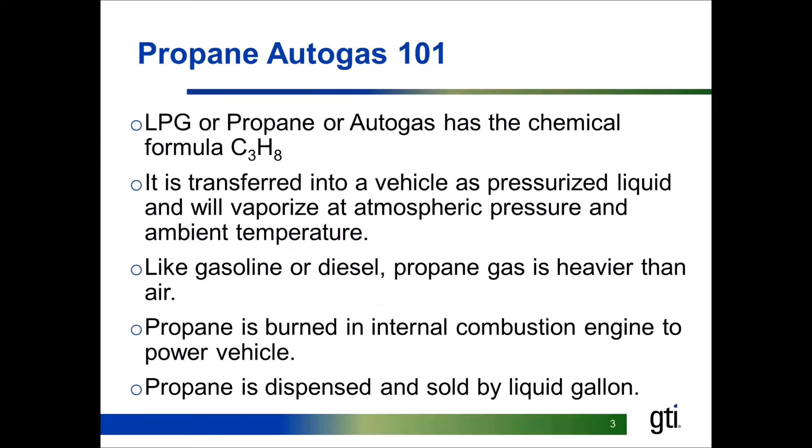Since 1993, the Energy Department's Clean Cities initiative has supported community-led efforts to deploy vehicle and infrastructure technologies across a broad portfolio of alternative fuels, helping to reduce America's reliance on petroleum.

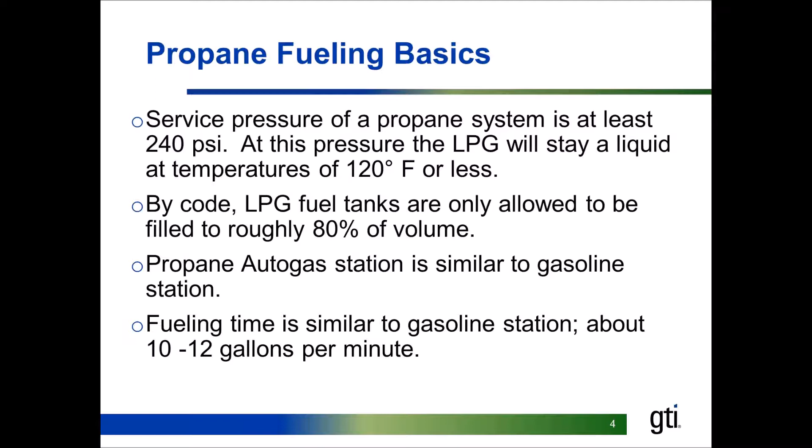A filling station for propane autogas is very similar to a gasoline station. I have a cartoon image of one on the next slide here to go through. The fill rates are similar, which is a nice benefit for many fleets, at 10 to 12 gallons a minute filling times.

So here's an image to give you an idea of a propane station. They can be very involved, with large canopies, very similar to a traditional gasoline station, and they can also be small, like you'll see at a U-Haul or someplace where you can fill up your propane tank for your grill. But the general parts are: there's a storage tank where the propane is stored, a pump that pumps the liquid to the dispenser, and then the dispenser puts the fuel into the vehicle. In general, it's a very similar process to what your traditional fuels do.

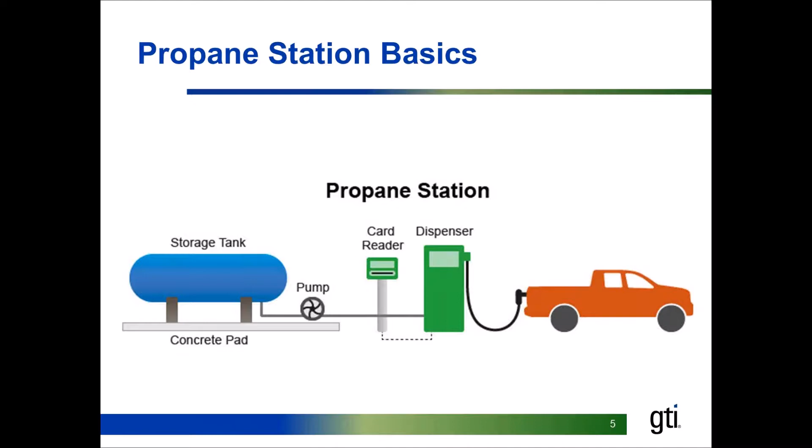We always like to cover safety hazards. It's important to remember that all fuels have situations and hazards you need to be concerned with, and with any new operation, training and education is always key. It's very important when looking at new alt fuels that you educate your employees on each specific fuel. For propane, the hazards are similar to gasoline: propane is a flammable fuel, and ignition sources should not be in the fueling area, like cigarettes.

Propane is stored at pressure, relatively low pressure, 200 to 300 psi, but there are hazards of pressure. There can be freeze burn if you come in contact with liquid propane, and propane is also an asphyxiating gas. All of these hazard situations do not occur under normal operations, but they are things you need to be aware of.

Now moving on to natural gas. CNG is the vehicle fuel. It's the same natural gas that comes to your stove, hot water heater, or furnace if you're on a natural gas pipeline. It's mostly methane. Throughout the process from the meter all the way into your vehicle, it stays as a gas.

We're not going to cover LNG, liquefied natural gas, in this presentation, though there are applications coming up more and more for LNG as well. So unlike gasoline, diesel, and even propane, natural gas is lighter than air and always in a gaseous form. However, it is burned in the same kind of internal combustion engine as a traditional vehicle.

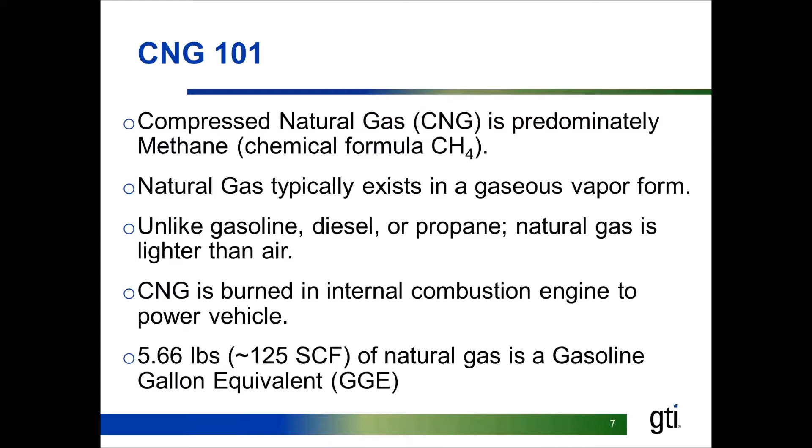When natural gas is sold at a station, it's sold in the gasoline gallon equivalent. It's not sold by a liquid gallon just because it's not a liquid. But what the natural gas industry has done is sell it with the same energy content. So when you buy a gallon of natural gas, you're getting the same fuel economy essentially as you would with traditional gasoline.

Natural gas CNG is stored at high pressures, so 3,600 psi is kind of the nominal pressure. That's at a settled pressure once filling is done. On a 70-degree day, 3,600 is where your tank should be at full. During filling, it heats up. On hotter days, you can fill up to 4,500 psi so that it would settle down to 3,600 at 70 degrees.

Fueling is typically done at a fast fill CNG station. The fill rate's about 5 to 10 gallons a minute. There are higher flow nozzles available. You can also have time fill for fleets that stay parked overnight in the same location. It's a slower process, and can take 4 to 10 hours. It depends on the size of your compressor and the number of vehicles, but it could be a lower cost option for larger fleets.

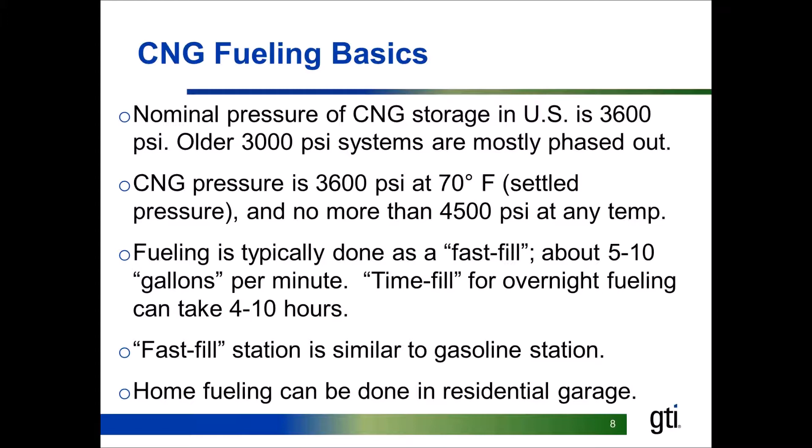Fast fill is similar to a gasoline station with a dispenser filling the vehicle. And home fueling can also be done. There's a residential appliance you can put in your garage, and a very slow fill overnight if you have an individual vehicle.

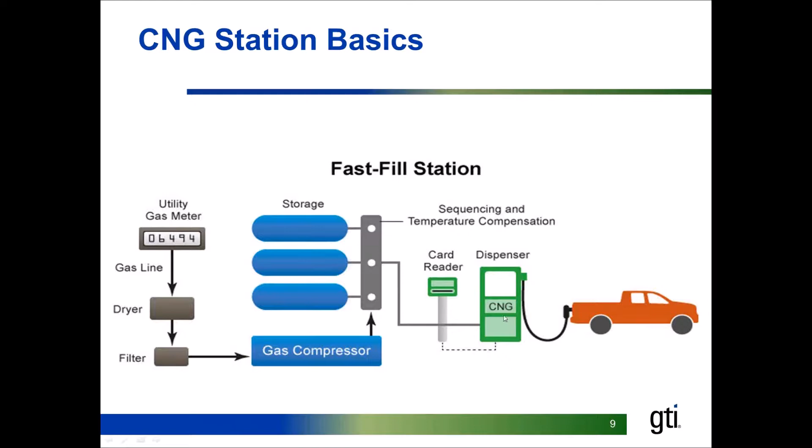CNG Station Basics: you have a gas meter, very similar to what you'll have at your home or commercial buildings. There's a dryer that takes out any moisture in the gas, a compressor that raises the pressure from your line pressure up to approximately 3,600, and then sends the gas to storage. The storage then flows the gas to the dispenser and into the vehicle.

Safety hazards for CNG: similar to all of these fuels, CNG is a flammable gas. Ignition sources are forbidden in fueling areas. CNG is stored at very high pressures, and high pressures can pose risk to operators. Natural gas is also an asphyxiating gas, which can displace oxygen if trapped in an enclosure.

The final fuel I'll give you a general background on here is electricity. Electricity is the same electricity that you have in your house typically. You have AC power delivered to your charging station - the technology term is the electric vehicle supply equipment. The AC power is typically converted to DC power in the vehicle, because it's stored in the battery as DC power, and DC drives the vehicle's electric motor.

So that's another difference - it's a completely different drivetrain. You have an electric motor rather than an internal combustion engine. Electricity is typically sold at kilowatt hour. When charging stations are used commercially, there's a variety of different ways people have used for charging: some have monthly subscriptions, some have a per hour charge, some have a price for hooking up, some charge per kilowatt hour, and there's other models out there as well.

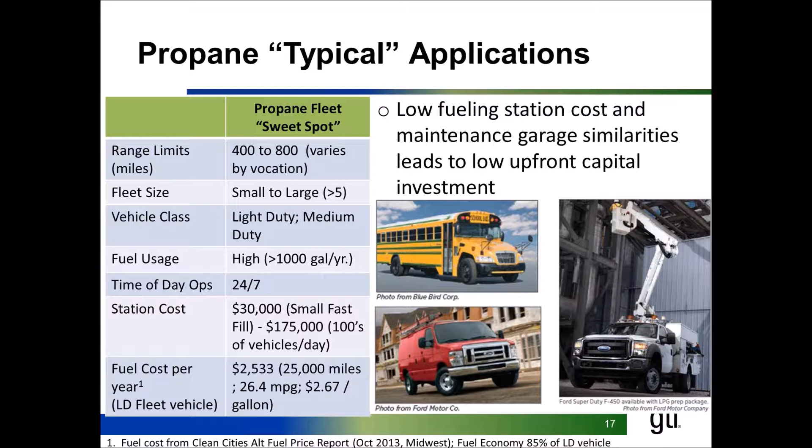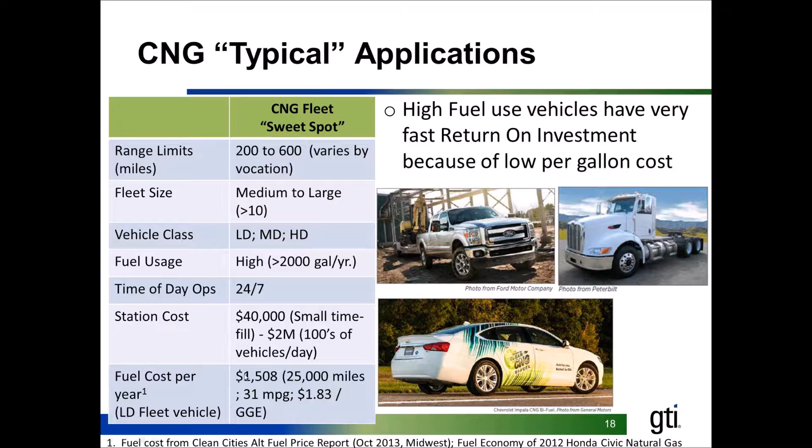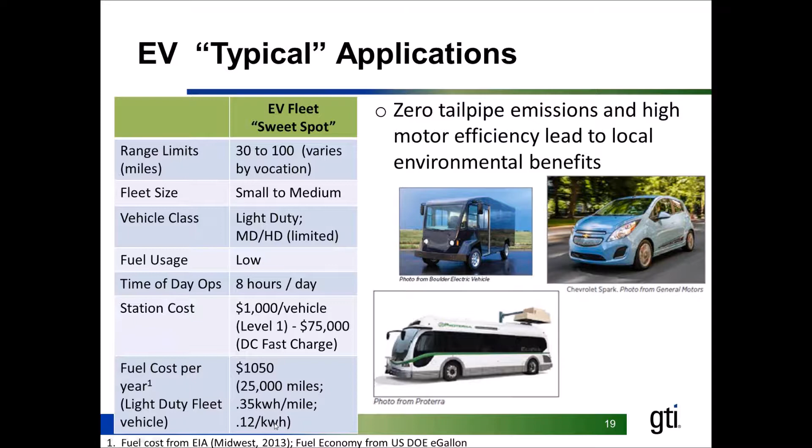Where EVs definitely shine are their station costs can be very low. The fuel costs can be very low as well because you're paying just for the electricity potentially. And then, of course, there's zero tailpipe emissions, and an electric motor has very high efficiency, so it's more efficient than an internal combustion engine, and so it can lead to wonderful, local environmental benefits.

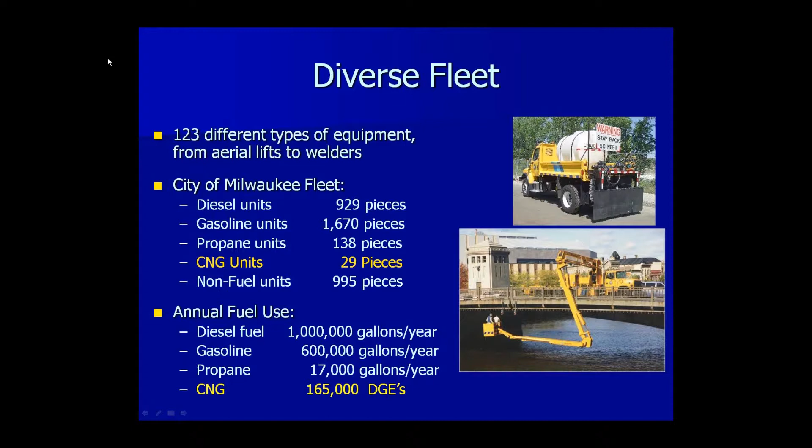First and foremost, I just wanted to say welcome, everybody. We have a very diverse fleet of equipment at the City of Milwaukee, and you just get an idea of some of the different types of vehicles we have and the amount of fuel that we use per year. The CNG right now, we are actually measuring it here in diesel gallon equivalents because most of our CNG vehicles are formerly diesel vehicles. I'll get into that in just a moment here.

The heavy trucks that we have include the 21 refuse packers. We have another 22 on order right now. We also have small, mid-sized cars, and we have 5 cargo vans that are running on CNG.

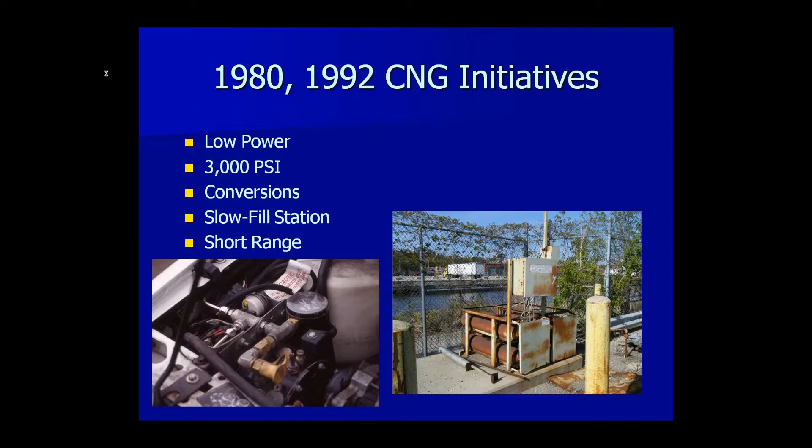Okay, the CNG and in general, the alternative fuels are really nothing new for us. We actually tried back in 1980 and in 1992 with a couple of different CNG initiatives. One of the pictures on the left there is of a Chevy Cavalier, where we converted the engine to run either gasoline or natural gas. And the picture on the right is the remnants of our old CNG station that was able to fill 1 vehicle per day. So back in 1980, that didn't really do us a whole lot of good.

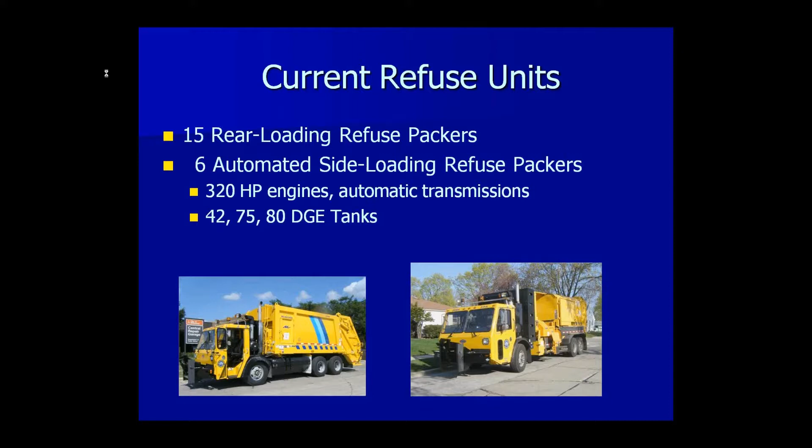Our current units, though, beginning in 2010, we have the 15 rear-loading refuse packers, the 6 automated side-loading. They do have the Cummins ISL-G engine at 320 horse, the largest at the time that we could get. The truck on the left actually has the 42 DGE tanks, and what we found is if you didn't have a good source of fuel, sometimes we had to refuel that truck a couple of times a day. The truck on the right has the 80 DGE tanks built into that black cascade right behind the cab. Unlike what you may have been reading in some of the trade magazines lately, where someone is claiming to have the first CNG snowplow in Wisconsin, we've been doing it with our trucks since 2010. What we've noticed is that the power on these trucks, especially when plowing snow, has not diminished whatsoever.

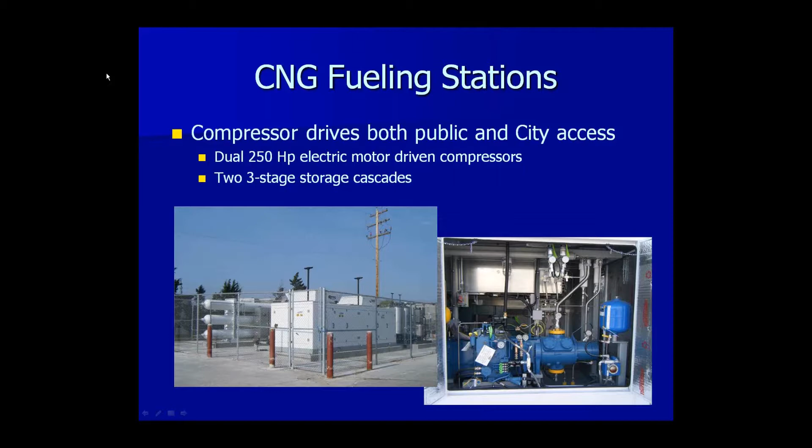Now, we have our own fueling stations that we built, and I'm sure Ted might appreciate this. This is the station over at our Lincoln facility, where we have 2 250-horse electric motor-driven compressors, and then we have the 2 3-stage storage cascades, one in the back here behind the fence. We have another one up front in our building because the stations were grant-funded, and because of that, one of the provisos was that we needed to provide CNG retail for customers outside of the city. Normally, we just would use fuel cards for our own vehicles, and the public didn't have access to those. But we were all too glad to do it, especially because we had this humongous compressing station for our vehicles where we can fill probably, I think, like 11 vehicles within a 1-hour period at 75 DGEs from nothing to fully compressed, which is phenomenal.

This is the fueling station access from outside the street. It's available 24/7. We have both 3,000 and 3,600 PSI available for the older vehicles that still run on 3,000 PSI, and it's credit card access only. The rear access for our other trucks is strictly 3,600 PSI, requiring an employee card or a mag stripe identification card.

But we also wanted to get into hopefully saving a little bit of electricity with regards to the slow fill portion of our system. Now, unlike some of the other people that we know have a slow fill where they just hook 20, 40 vehicles up at the end of the day, and the system comes on maybe at 8 at night or so and saves a little bit of electricity, we actually want to know exactly how much fuel went into each vehicle.

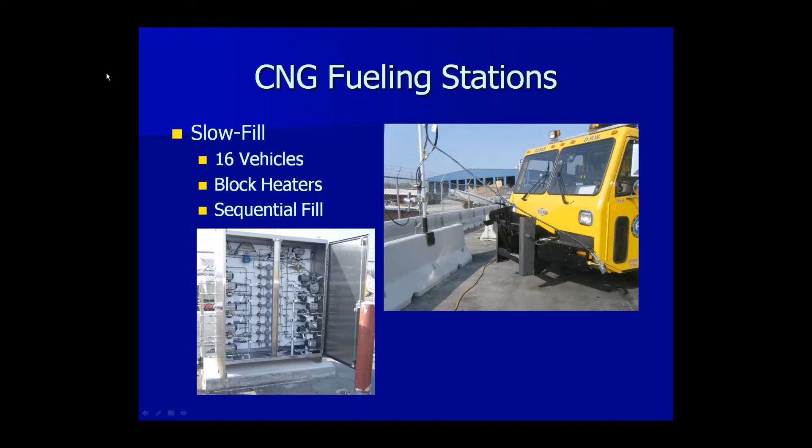So what we did is we built what we call a sequential time fill, and it works very simply. You need to authorize the truck, plug it in, hook up the hose, hook up your block heater if it's a little cold in the winter, and then authorize with your fuel card. When the station kicks in, it will fill one vehicle at a time, then moves to the next, and so on, but it records each transaction.

Now, some of the problems we've noticed with our CNG, and this is something you may run into down the road, is we've had some leaks. The picture on the left shows the 3 large tanks in the cascade here.

One of them has a rag tied around it. There was an O-ring that started leaking right where that rag is, a rather simple fix, but it caused a little bit of panic when the driver heard this hissing and saw white smoke and smelled gas. So it created a little bit of panic. But after things like this have occurred on occasion, I think we've had about 3 instances in 4 years.

with 21 trucks at this point. People learn, okay, you hear the hissing, you've got to get around to the other side of those tanks and shut those valves off one at a time. They were able to isolate the leak by doing that, and then still drive the truck in using one of the other tanks. In other words, they opened the valve, didn't hear any hissing, and there was still enough fuel in that one tank that they could limp home.

We've also found with some of the storage cascades, like the one on the right, they have relief valves built into them too. If your system has a little bit of moisture and it gets very cold, you might find those relief valves freezing up a little bit. We actually had a couple instances where a relief valve would kick and vent fuel. We were able again to isolate that, but we had to have the fuel maintenance people come down and replace all of those relief valves.

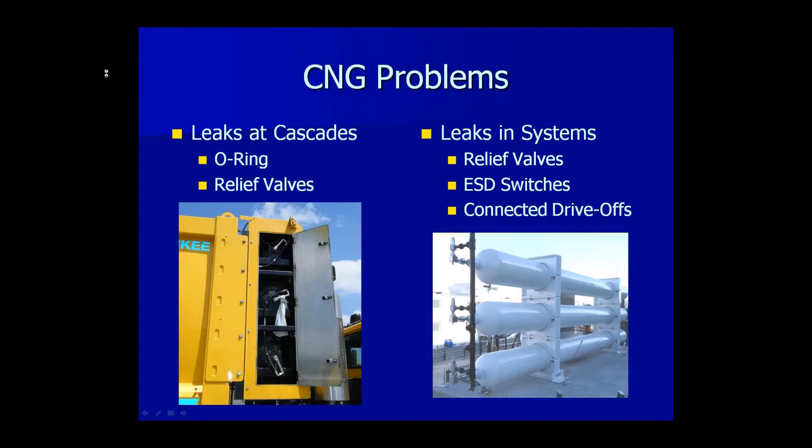We've also had 2 instances where people drove off with the hose connected. Fortunately, in our case we have surveillance video, and we were able to identify the person and track them down. They really did not appreciate the bill we sent to fix it up, but what are we supposed to do? It was a lot of money we had to spend to get it back up and running the first time. So those are some of the things we've noticed.

Regarding the electric equipment that we have... I'm sorry, is somebody trying to talk there?

Okay, sorry about that. The electric equipment includes a Chevy Volt, which of course looks great when you say 277 miles per gallon. We also have 16 hybrid cars. Regarding that plug-in, it should be noted that we've only put 41 gallons of fuel into it all this time, so we don't exactly know the electric costs. We also have hybrid electric and hybrid SUV cars.

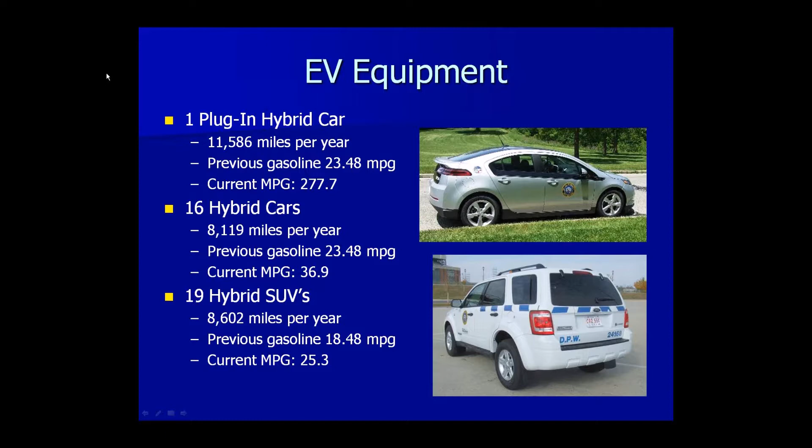Now I see there's a question posed by someone: can you address the fuel economy? I think what I'll do is back up to one of these refuse packers we have here. These trucks, believe it or not, are nowhere near as efficient as something that's over the road. By that I mean we're getting about 1.9 miles per gallon with these trucks. But bear in mind, their main duty is to pull up in front of someone's house, idling and compressing the garbage in the back of the packer using hydraulics, then move on to the next site. We've actually noticed about a 0.2, maybe 0.3 of a mile reduction in fuel economy from the diesels at 2.1 to the CNGs at about 1.8 to 1.9.

And let's see, that's the end of my program. If there are any questions, or if anybody else wants to chime in at this point, please do.

Maybe Jeff's not still on the call. We can check back with him later. Yeah, see if he gets back on. Okay, well, thank you, Jeff.

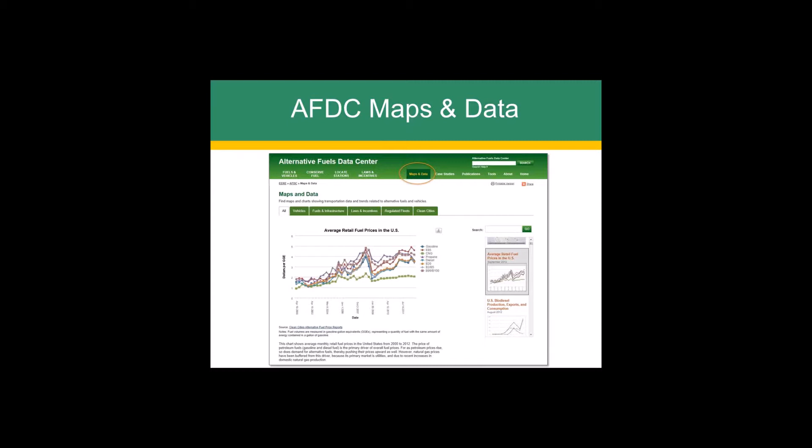The next slide is the AFDC Maps and Data. This is a vast collection of data with easy-to-read charts and maps to help policymakers, fleet managers, technology providers, and the general public find information about infrastructure and vehicles, and geographic information if you wanted to analyze technology trends and future technologies for your organization.

The next slide is the Petroleum Reduction Planning Tool. It's a free tool that allows users to create their own plans for petroleum use reduction within their fleets. If you're not sure how you want to implement alternative fuels into your fleet, this is a great way to plug in numbers and set annual petroleum use reduction goals, including the entire Clean Cities portfolio of alternative fuels to help you meet those goals. It can be used as a guide for future fleet purchases and strategies, and allows multiple scenarios to discover what strategies work best for your emissions, petroleum use, and budgetary goals, because everybody is different.